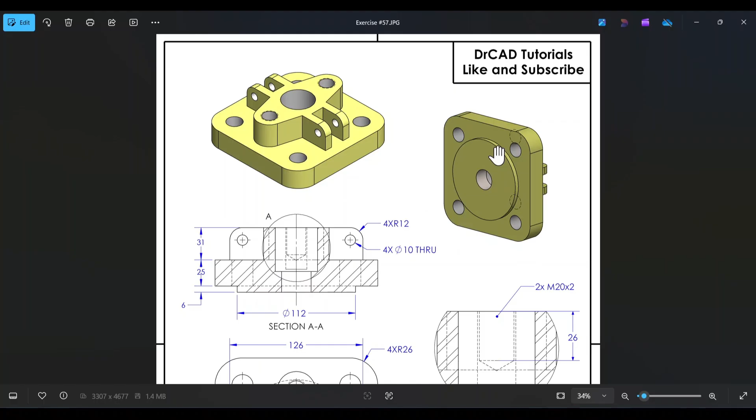Here we see the schematic drawing for exercise number 57. All dimensions are in millimeters. We have two isometric views showcasing the component at two different angles, particularly one showing the physical features at the bottom, because here we see that we have a protrusion. We also have the top view and the section view, taken along cutting plane AA.

And we have a detail view, which showcases the internal features for the hole here, the threaded hole. It's an M20 by 2 type hole, and we have two of them on either end of the top flange.

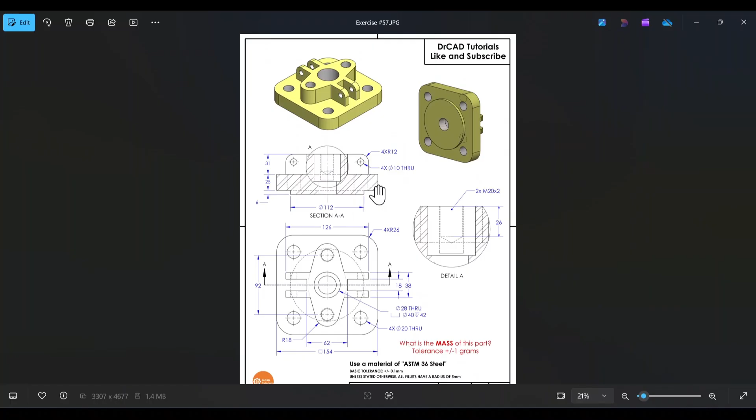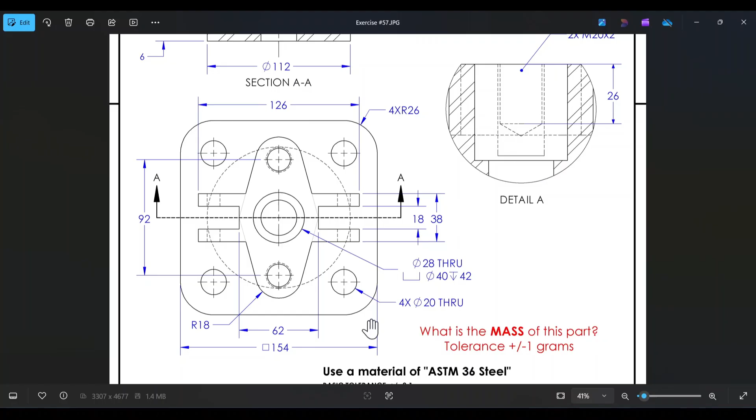In modeling this part within SolidWorks, we're going to be following a feature-driven approach. The idea is that we look at the physical features and then determine the 3D processes or features we're going to use. The first physical feature that stands out, looking at the top view, is the square flange, which is the largest flange within the component.

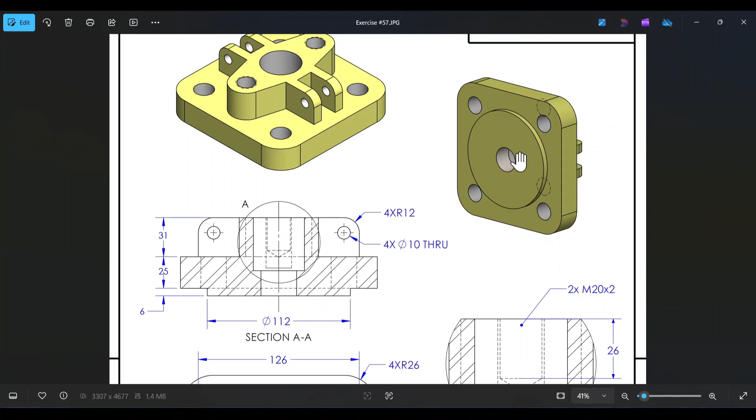So naturally, in creating this part, we're going to sketch out a rectangle or square using the center rectangle tool, and then use the extrude boss base to create the thickness. Then we have this circular protrusion, sort of like a boss, on the bottom of the component, so we're going to select the bottom face, draw a circle, then use the extrude boss base tool. After that, we're going to create the 4 mounting holes.

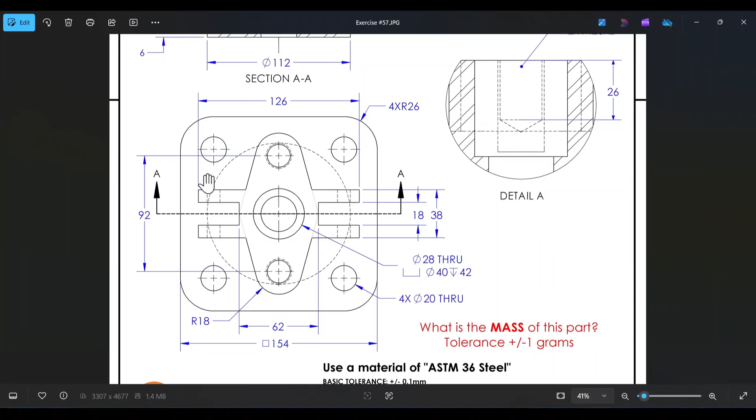Of course, after we've defined the fillets on the 4 corners of the square base flange, we're going to create the last physical feature, which is the flange at the top. The idea is for us to sketch out the 2D profile clearly shown on the top view, and then use the extrude boss base tool to create a thickness. In this case, the thickness is 31 millimeters. Then we add the holes.

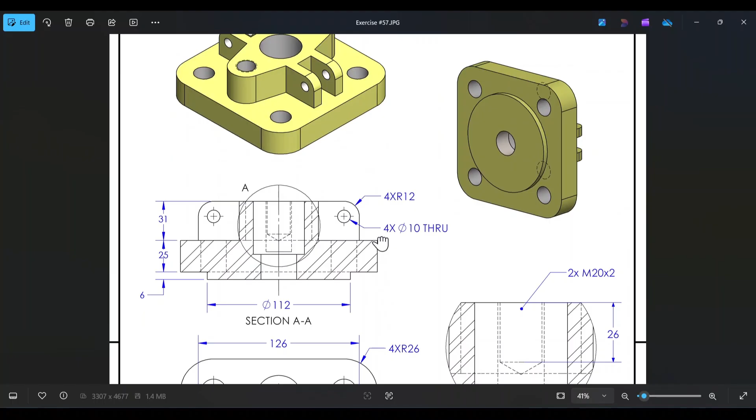We have the counterbore feature for the hole in the middle. So again, we can use the hole wizard tool, or more naturally, use the extrude cut tool twice - first with a larger hole, then a second one. That's what we're going to use, the standard extrude cut tool, because it's intuitive and easy for beginners.

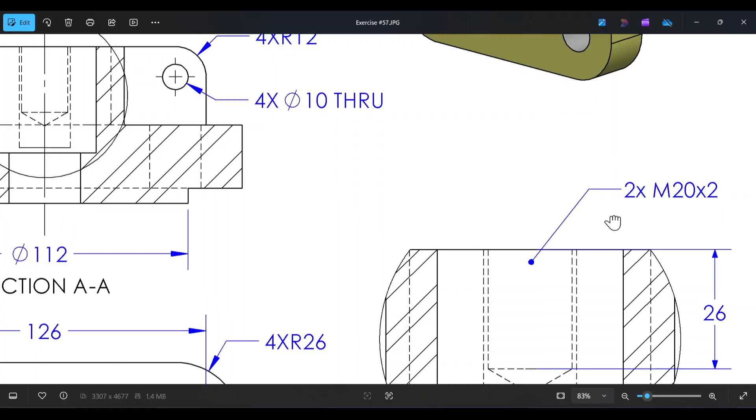Finally, we're going to be creating the 2 mounting holes, which are threaded mounting holes. If we look closely, we have a cosmetic thread, not particularly shown clearly within the drawing, but represented by these dashed lines. For that, we'll use the hole wizard tool, a very easy process. The most important thing is to define the type of threaded hole or drill thread - here it's M20 by 2, and the thread depth is 26 millimeters.

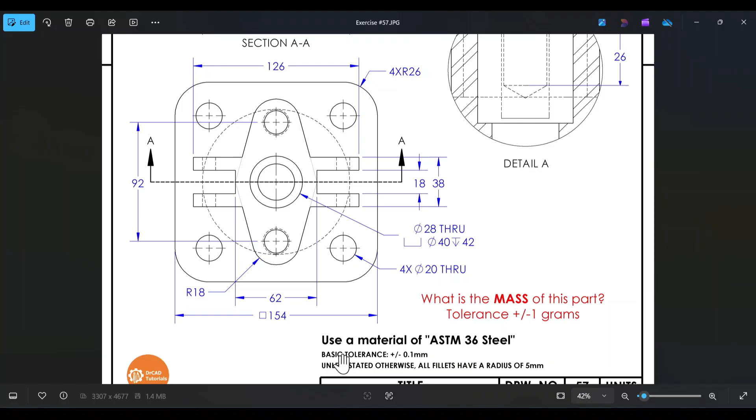And of course, finally, after modeling the part, we need to determine the mass of the part in grams. Here we see that we need to use a material of ASTM 36 steel, and unless otherwise specified, all fillets have a radius of 5 millimeters. So where a fillet isn't defined - and hopefully all fillets are defined - by default we'll assume it's 5 millimeters.

Okay, so with that aside, let's get started with exercise number 57.

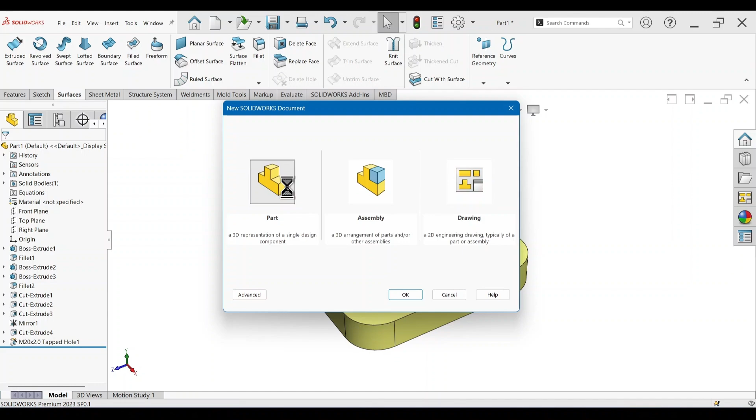Okay, so to start, we create a new SolidWorks part. We set the background to plain white. Again, this is a personal preference. You can use different kinds of backgrounds, for example this color, but I personally prefer plain white, for those of you who are wondering.

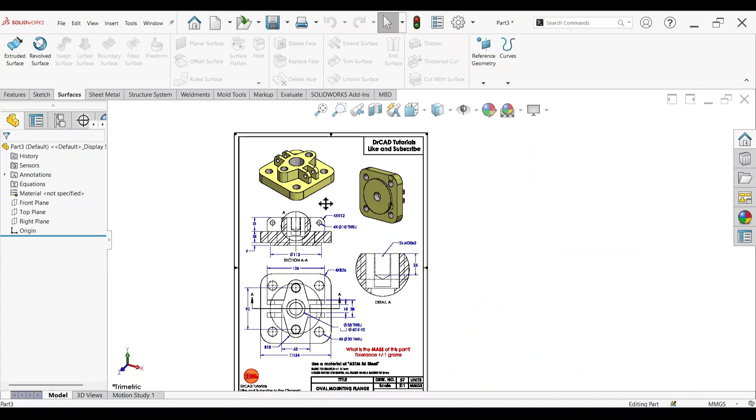And we copy exercise number 57 into SolidWorks. All right, so let's drag this upwards, let's reduce the size. All right, so step 1 involves creating this square base flange.

So naturally, we're going to select the top plane, sketch, activate the center rectangle tool right here, and from that origin, draw a square, or rectangle in this case. Select these 2 entities, and then set the relation as equal, so it's going to become a perfect square.

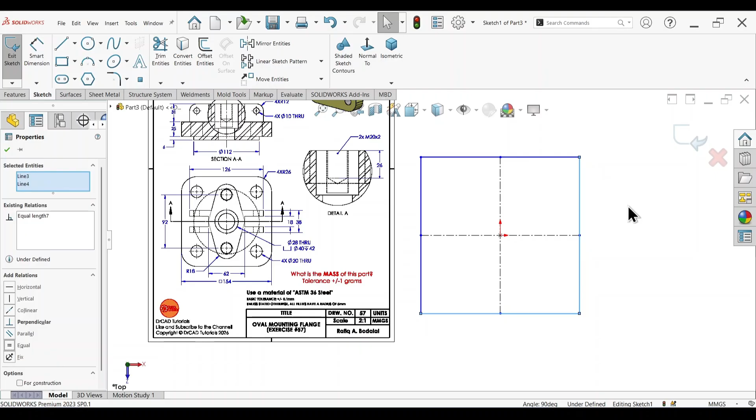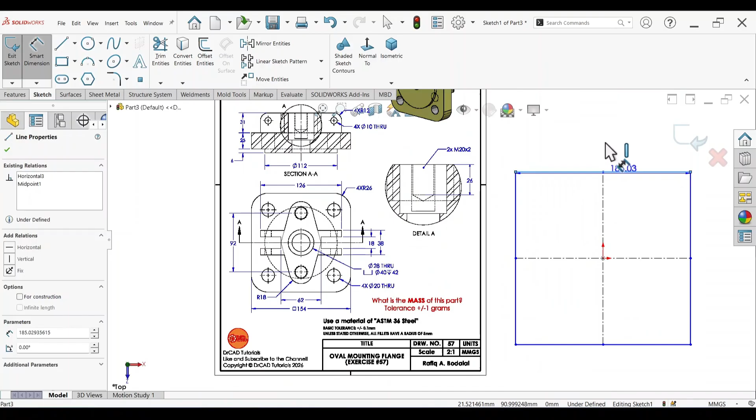Now activate the Smart Dimension tool, and if we look closely at the top view, we see that for the base flange, the dimension should be 154 millimeters. This square symbol means that for this rectangle, it's a square, so the dimensions on this side and this side are equal. So this needs to be 154 millimeters.

Okay, now just press the S key, extrude boss base. And if you look at the section view, we can see here that for the square base flange, the thickness should be 25 millimeters. Then click OK. All right, so that creates the base flange.

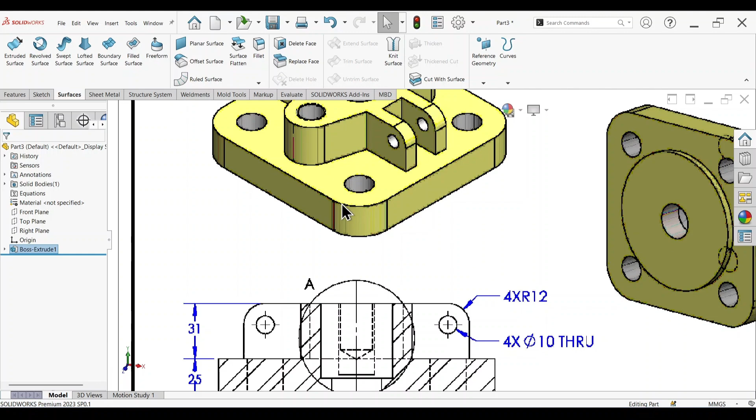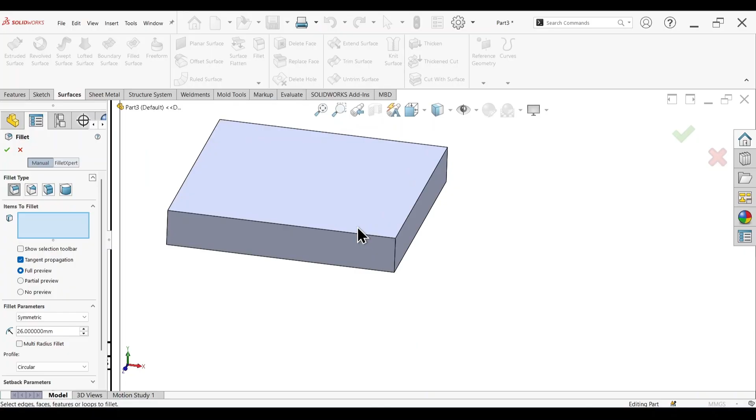Of course, we have a fillet for the four corners of the square profile here. So what we could do is just press the S key, select fillets. And if you look at the top view, we see here that we have 4 fillets for the 4 corners of the square, and each fillet has a radius of 26 millimeters. So go ahead and enter a radius value of 26, and very simply just select the 4 corners. That's 1, 2, 3, and 4. All right, and then click.

Okay, so now let's proceed to create the extrusion here at the bottom. If you look at the section view, we see that the circular profile needs to have a diameter of 112 millimeters, and the protrusion needs to be 6 millimeters thick.

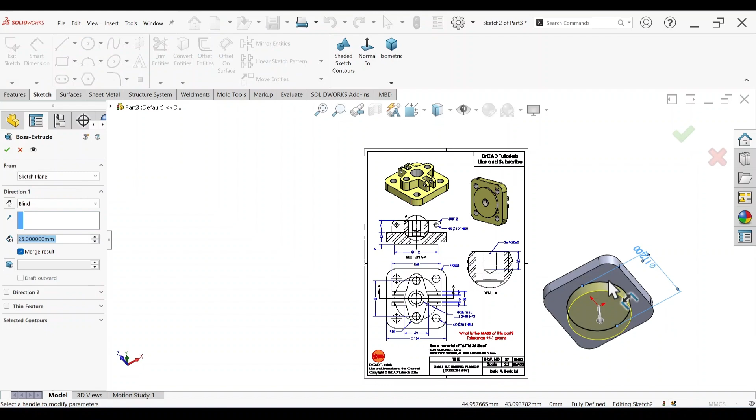So just click on the bottom surface, sketch, activate the circle tool. From the origin, draw a circle, activate the Smart Dimension tool, and this needs to be 112. Press the S key, extrude boss base. Again, set the thickness to 6, enter. All right, so that creates the protrusion at the bottom.

Now let's just create the 4 mounting holes for the square base flange. So just click on the top base, sketch, activate the circle tool, and just hover your cursor over one of the curved surfaces, and that will wake up the center point of the circle. And the center of the 4 mounting holes corresponds to this point right here.

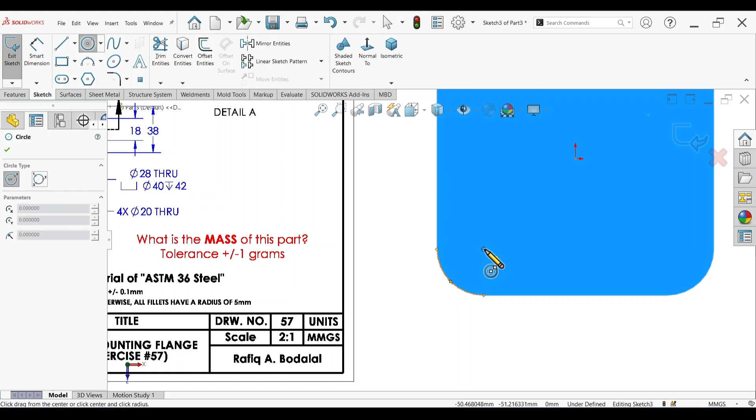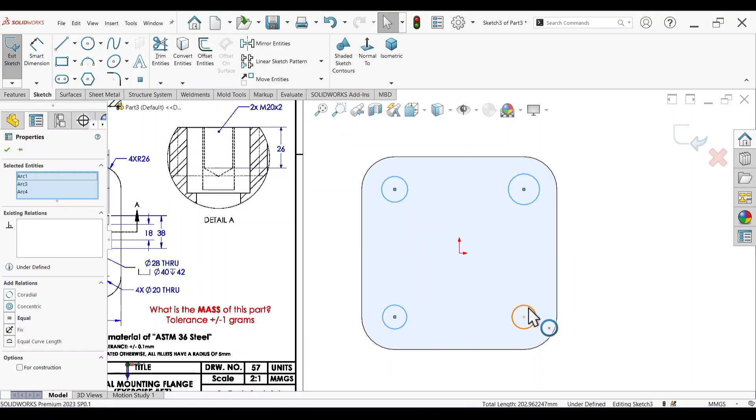So that's 1, again that's 2, 3, and 4. All right, click on these 4 circles, holding down the control key to select them all, and set the relation as equal, so they all now have equal diameter. Activate the Smart Dimension tool, and from the top view, we see that we have 4 holes, and each hole has a diameter of 20 millimeters, and the holes are through, meaning they go all the way through to the other side, as you can see here. Okay, so this is 20.

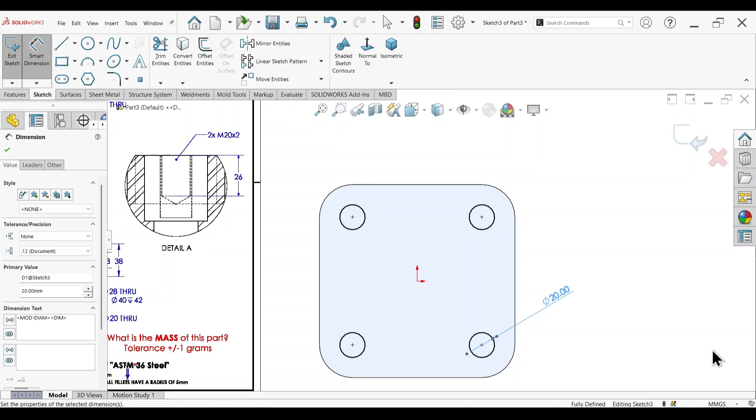Press the S key, extrude cut. Right click on your mouse, and then click on through all both directions, and then click OK. All right, so that creates the 4 mounting holes.

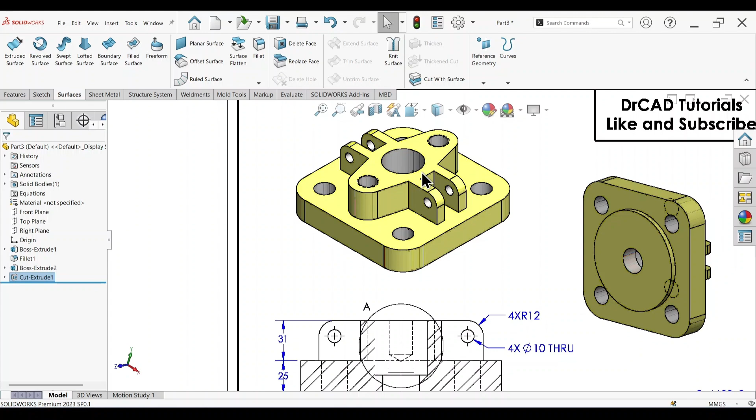Now for the tricky part. It's not necessarily tricky, but there's a certain degree of sketching to it. Now we need to create this top flange right here, this physical feature here at the top. So the strategy here, guys, is for us to sketch out the 2D profile that we see here, and then use the extrude boss base tool. Okay, so let's go ahead and select this top face, sketch.

And if you look closely here, we need to create this 2D profile. The easiest way is for us to first proceed by sketching our rectangle, then creating 2 circles, that's 1 and 2, and then using the line tool to create 2 tangents. The tangent line here connects all the way to the center point of this line here, okay? So let's go ahead and create the rectangle. From the origin, draw a rectangle.

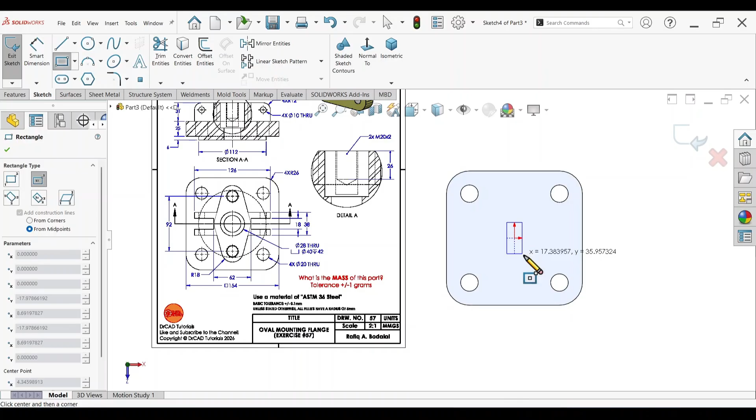Activate the circle tool and draw a circle at any point. That's one of the circles. Click on the center of the circle, hold down the control key, and click on the origin. Set the relation as vertical.

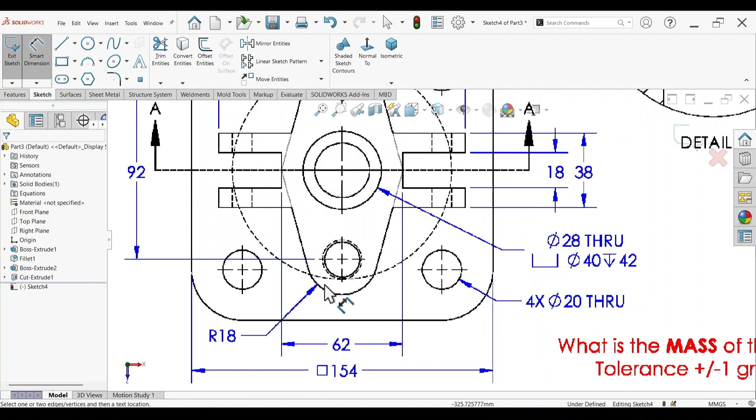Activate the Smart Dimension tool. The largest circle should have a radius of 18 millimeters, so this should be 18 multiplied by 2, since we're defining the diameter.

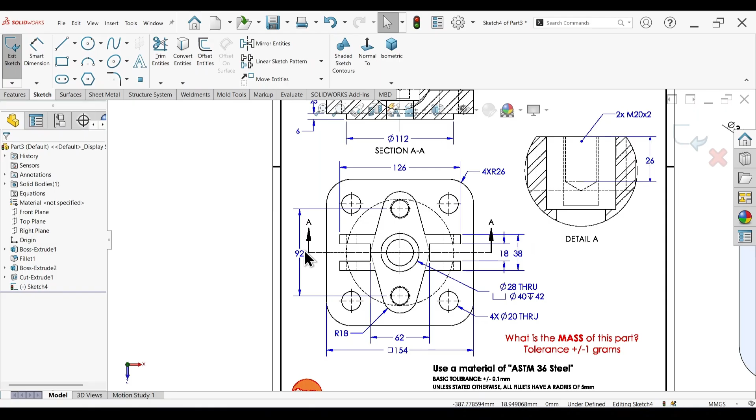As for the distance, we see that the distance from one end of the circle to the other, from one point to the next, is 92 millimeters, and there's a point of symmetry along the x-axis. So activate the Smart Dimension tool, and the distance from this point to the origin should be 92 divided by 2. See how the circle turned black, meaning it's fully defined.

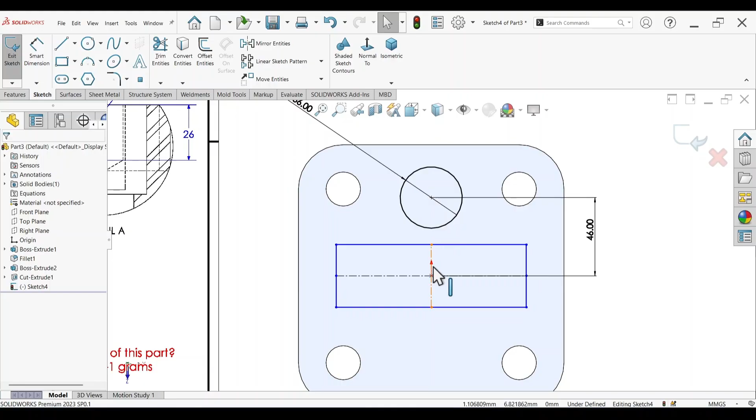We define the diameter, we define the relation of the circle, we define the position of the circle in relation to the origin vertically and the distance as well.

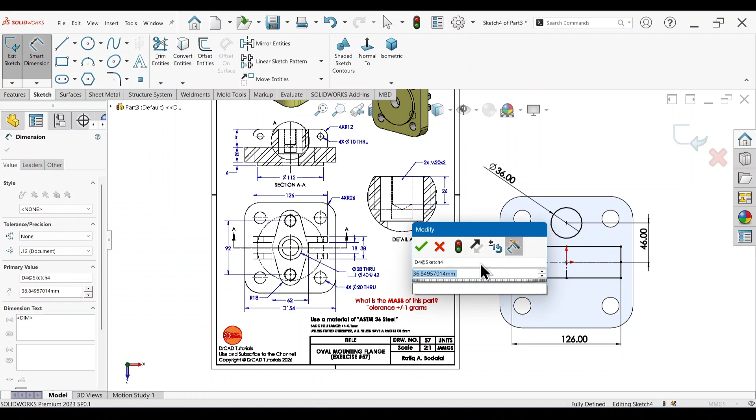Activate the Smart Dimension tool. We see that for the rectangle, it is 38 millimeters from one end to the next by 126. So this should be 126 by 38. Now we need to create this rectangular opening.

So what we need to do is select the corner rectangle tool, and from this point, draw a rectangle. We need to set the relation between the center of this rectangle, this edge, and the origin as horizontal so that it's perfectly symmetrical.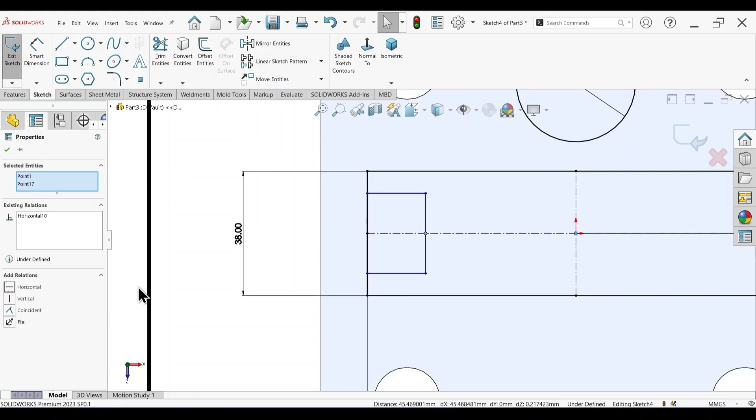Activate the Smart Dimension tool, and we can see clearly here that from one end to the next, the inner edge for the rectangles is 62 millimeters. Since we have the origin dividing the component in half, the distance from this edge to the origin should be 62 divided by 2.

As for the thickness of the edge here, it should be 18 millimeters. So activate the Smart Dimension tool. This should be 18.

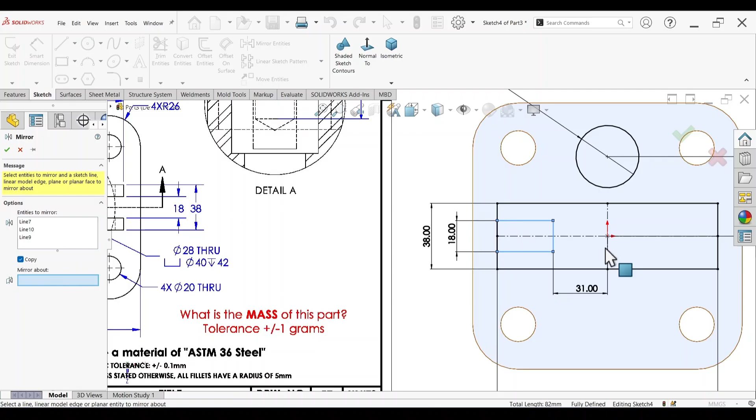Now we just need to copy this to the other side. Press the S key, click on Mirror, select entities to mirror - click on these 3 lines, 1, 2, and 3 - mirror about this vertical line, and click OK.

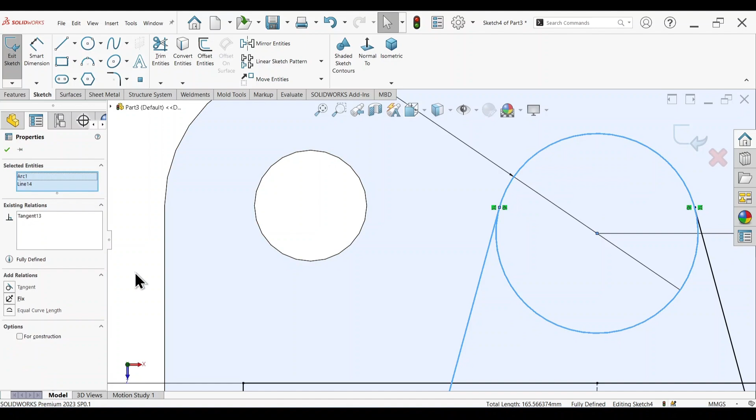Now activate the Line tool and draw a tangent all the way to this point. That's 1 and 2. Just make sure the line is tangent to the circle. It may be tangent, but I'm a person who suffers from OCD - I have to make sure everything's perfect.

Now we need to mirror entities again. Mirror these 3 entities - 1, 2, 3. Click on these entities, mirror about this horizontal line, and click OK.

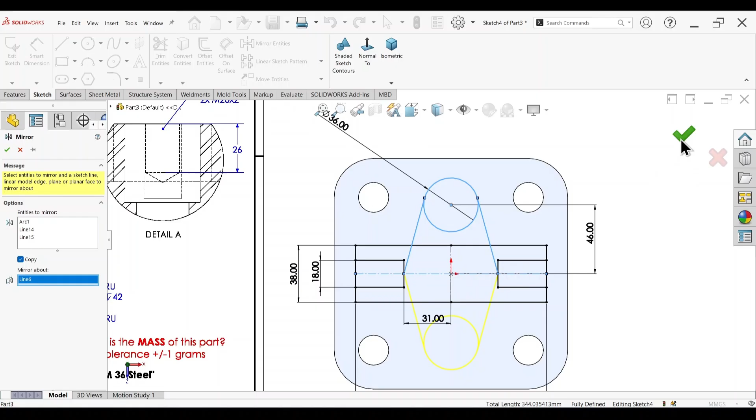Now we have the basic profile for the sketch. Now it's just a trimming process. We need to activate the trim tool and delete any extra entities that we don't need, leaving behind the basic 2D sketch for the profile.

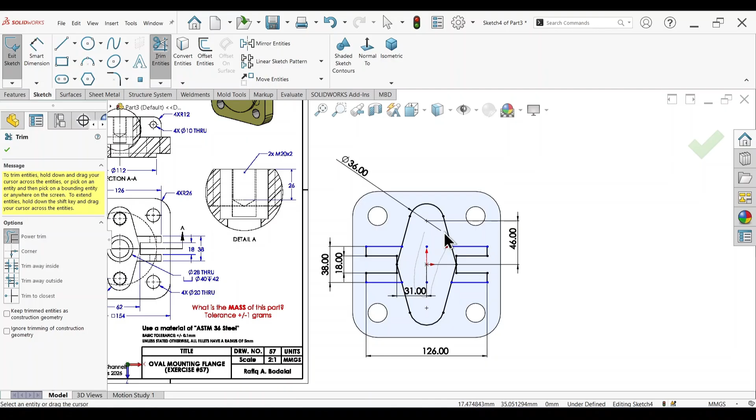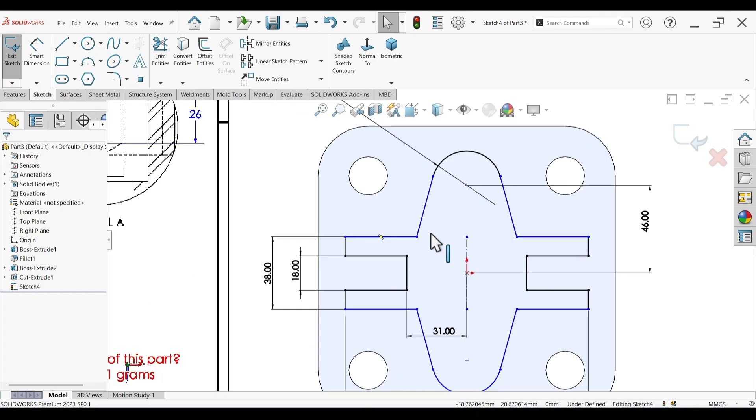Just to be sure not to delete any extra entities. Don't worry about any of the blue lines here - the sketch is fully defined in the sense that all necessary dimensions are defined, and we use the mirror tool, so everything's okay. Now we need to press the S key and extrude boss base.

We're going to extrude this. If we look closely here, the extrusion should have a thickness of 31 millimeters. So enter a thickness of 31, enter, and then click and press enter again.

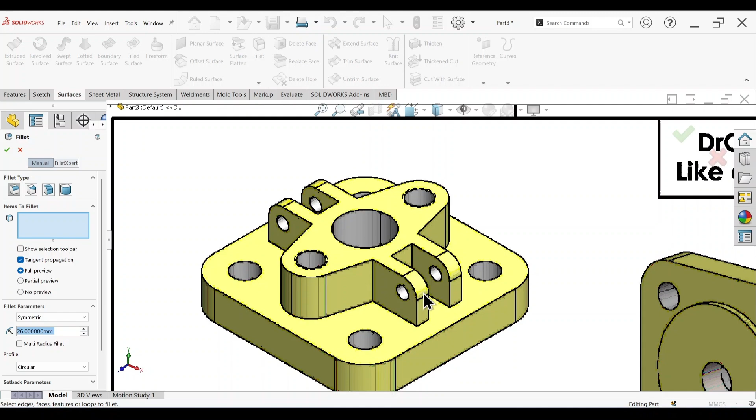Now press the S key, fillet, and looking closely at the isometric view, we have 4 edges that need to be filleted, each with a fillet radius of 12 millimeters. So enter a radius of 12, and click on these 4 edges, 1, 2, 3, and 4.

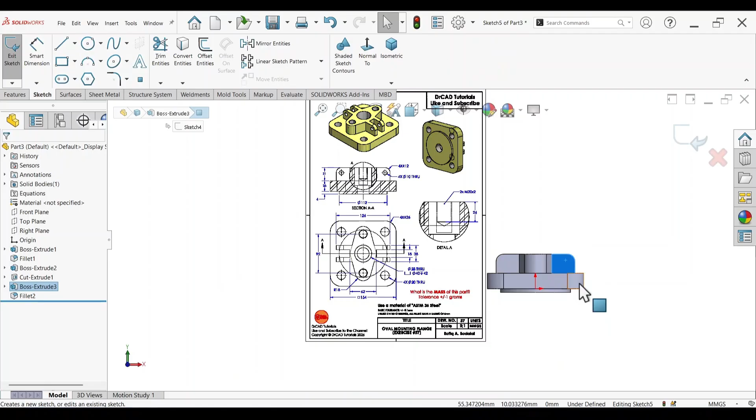Click OK. Click on the surface, sketch, activate the circle tool again, and we need to create the openings here.

And this circle has 4 holes, each with a diameter of 10 millimeters. As to where we should place them, if not defined, hover your cursor over the curved edge here, wake up the center point, and place the circle on the point.

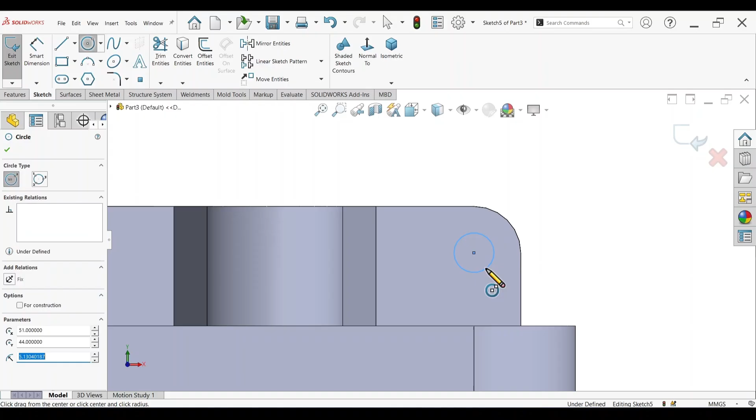Activate the Smart Dimension tool. This is 10 millimeters. Press the S key, extrude cut. Right click on your mouse, and it's already set to through both directions, then click OK.

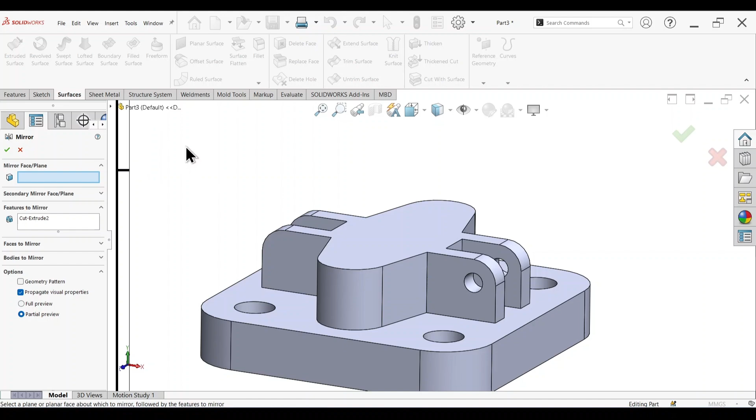Now we need to do this on the other side. So press the S key, mirror. Notice how I'm using the S key - it saves a lot of time, you guys. Keep it as a habit to always use it. Just go ahead and select the right plane. Click OK.

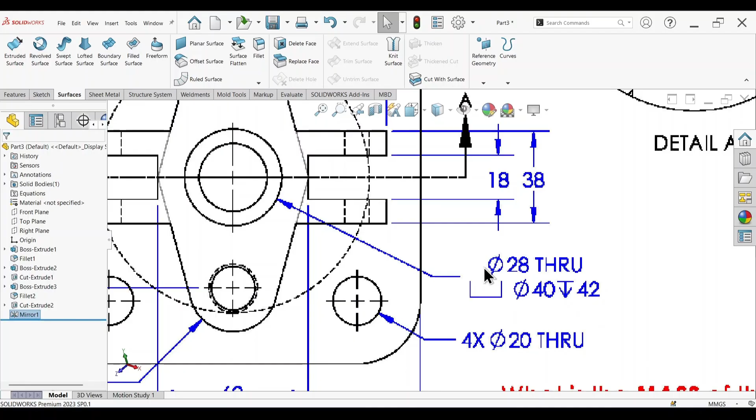Now let's create this counterbore hole. If we look closely, we have a counterbore feature which is 40 millimeters in diameter, with a cut depth of 42. And for the smaller hole, we have a diameter of 28 millimeters, and the hole goes all the way through the component.

So: 40, 42, 28. On this surface, sketch, circle tool from the origin, draw a circle, Smart Dimension, 40, S key, extrude cut, 42 - or just right click, blind, enter a cut depth of 42 millimeters, enter, enter.

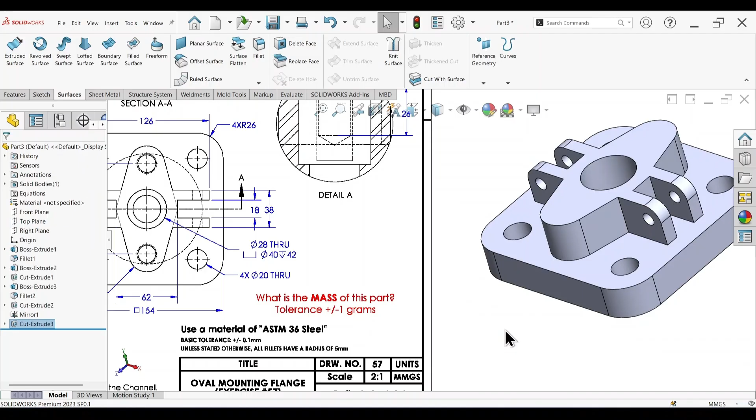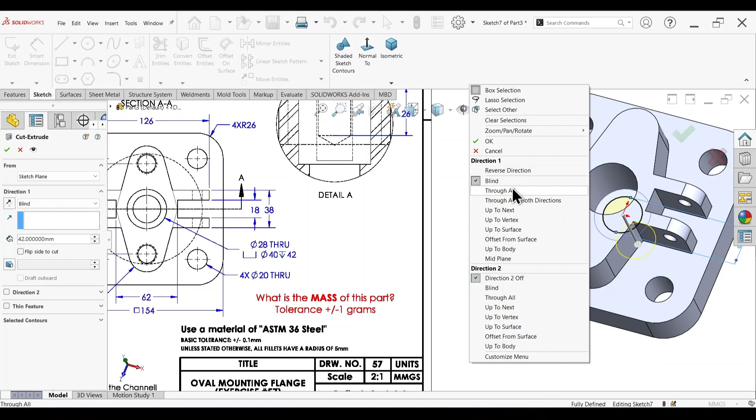Click on this surface, sketch, activate the circle tool. From the origin, draw a circle. This needs to be 28. S key, extrude cut, right click, through all, okay. All right, so that creates the counterbore hole right in the middle of the component.

Finally, we need to create the threaded mounting holes right here. It's actually a drill threaded hole, okay? So what we're going to do is go to Features, select Hole Wizard, and just click on that.

Go ahead and select the straight tap option, and select the ISO standard, since we're dealing with the International System of Units here. If you're based in the United States, you can use ANSI, but I'm going to use the ISO unit. So size is M20 by 2.

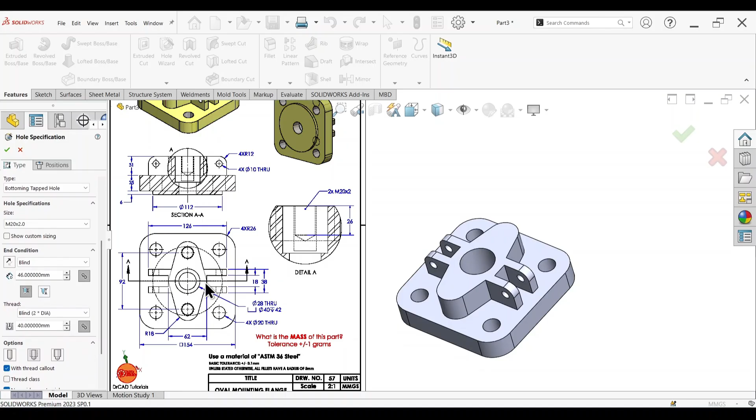The thread depth here, if you look at the schematic drawing, it's 26 millimeters. So this is 26.

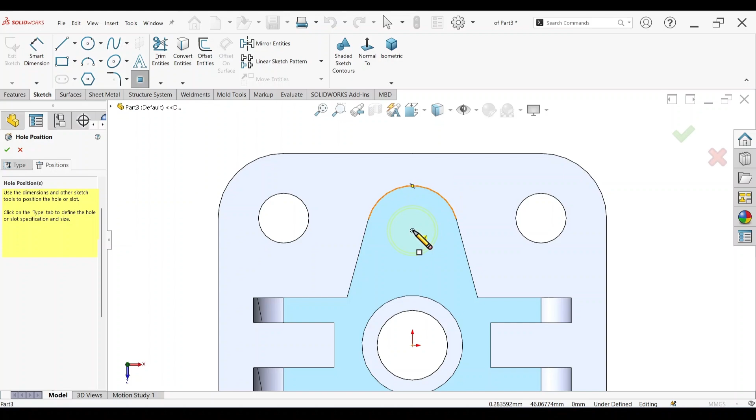Now that's fully defined, just go to Position, click on the face you want the hole to be on, and now define the position. Position will obviously be right here. If we hover our cursor over the curved edge and go over the point here and click, that's one. And for the other, hover and click on the point here, that's two. Then click OK, and that creates the threaded holes.

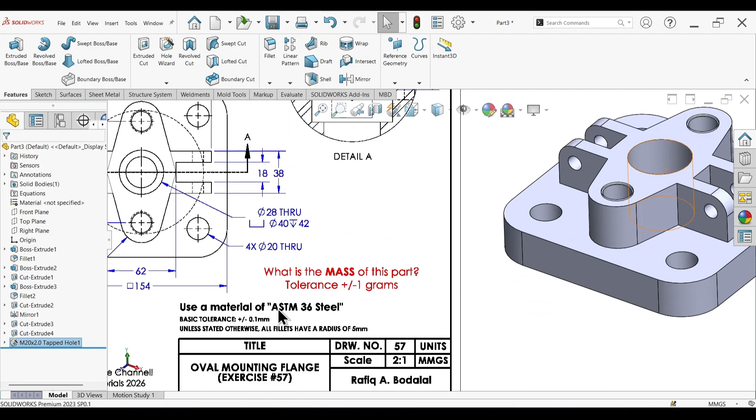And yeah, that's the modeling process. So again, we need to assign a material of ASTM A36 steel. For now, just delete this image.

You can color the component, but before that, let's assign the material. Right click here, edit material. Select ASTM A36 - let me just find out where it is. There it is, okay. Apply, close.

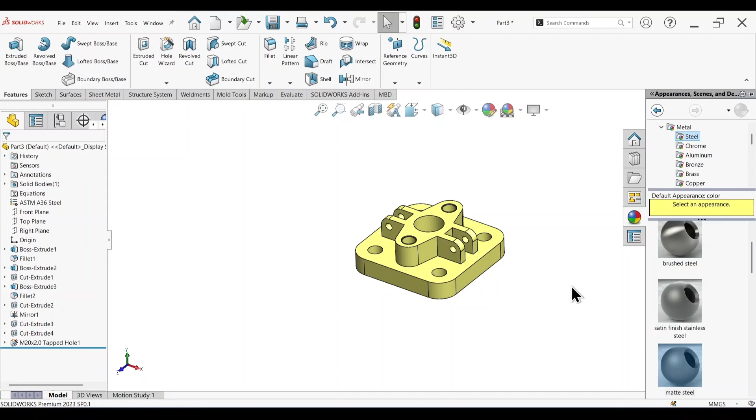Now let's color this. Go to Appearance, click on a nice yellow color. If you want to color the internal faces to represent the metallic surfaces, you can do that as well. If you don't want to waste time, you could just move on to the next step, which is finding the final answer. But I like to color things.

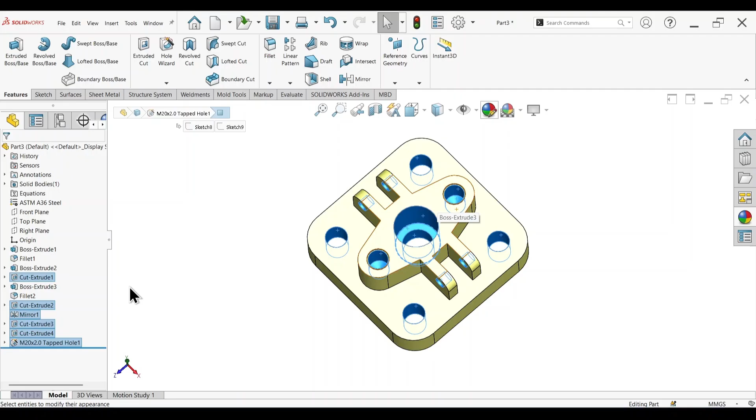All right, so Appearance again. Let's select Grayscale and select a nice light brown, light gray color. Click OK.

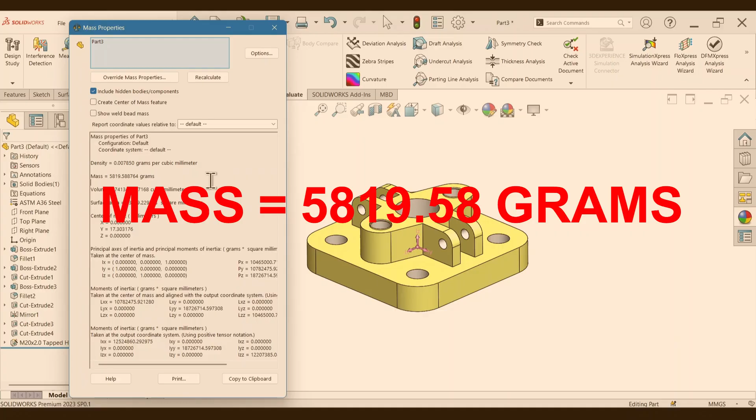So now for the moment of truth, go to the Evaluate tab, Mass Properties, and we have a final answer of 5,819.58 grams. So 5.8 kilograms, if you want to round things up. That is our final answer.